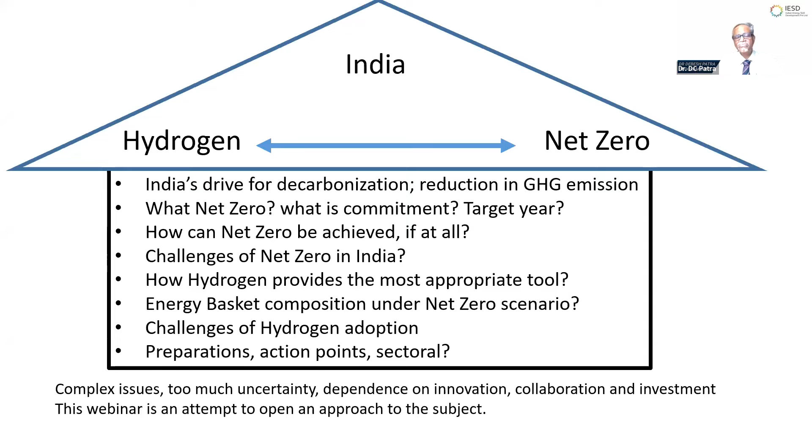If you look at the domain this subject covers, it covers scientific study, technical innovation, economic analysis, business strategy, and public policy. You can see the vast scope of these domains. We won't touch everything under this domain, but we will see the outcome of this discussion as it is happening at a global level.

The first question we'd like to address: what is net zero? Everyone has some idea about net zero, but let's get clarity and precision. Net zero is also referred to as carbon neutrality. It does not mean that a country would bring down its emissions to zero.

It implies the employment of a mechanism that would offset the amount of carbon emitted by a country into the atmosphere by absorbing an equivalent amount of greenhouse gases from the atmosphere. That is why it is called net.

The time taken to reduce net emissions to zero, and thus the total mass of greenhouse gases in the atmosphere, will determine the final equilibrium temperature of the Earth. The scientific community has given us a target of 2 degrees Celsius, and in some places it is referred to as 1.5 degrees Celsius above pre-industrial times.

We must also understand that from the pre-industrial time till today, say till 2022, there is already some amount of greenhouse gas existing in the atmosphere. There is a theoretical limit beyond which the temperature would exceed 1.5 or exceed 2 degrees Celsius.

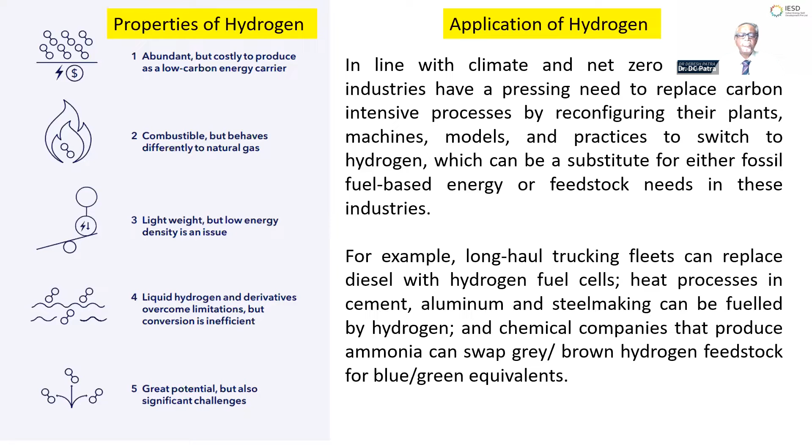Now, some examples to understand the implication. Long-haul trucking fleets can replace diesel with hydrogen fuel cells. Heat processes in cement, aluminum, and steel making can be fueled by hydrogen. Chemical companies that produce ammonia, currently using gray or brown hydrogen, can swap for blue or green equivalents.

So, putting everything together, hydrogen - the question I am addressing here - so much of hydrogen is being spoken about. Is it a hype, or is it an imperative and a possibility?

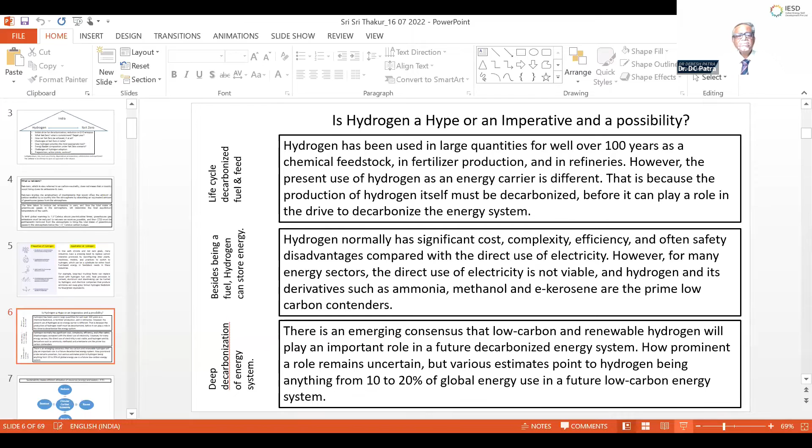There are many things spoken about hydrogen. A significant point we need to know is that hydrogen as a fuel is nothing new. But what is new today is that decarbonized hydrogen is what we are talking about. Therefore, the life cycle of hydrogen, right from production till its consumption, has no carbon emission.

The second important point is hydrogen can be used not only as a fuel, but it can store energy, and therefore carry energy from one place to another where it can be better consumed. Hydrogen derivatives like ammonia, methanol, and synthetic kerosene are the prime low carbon contenders, as an example.

The third significant point about hydrogen, from which I can make a statement that it is not a hype, it's an imperative and a possibility: there is an emerging consensus that low carbon and renewable hydrogen will play an important role in the future decarbonized energy system. How prominent a role remains a bit uncertain, but various estimates point to hydrogen being anything from 10 to 20% of global energy use in a future low carbon energy system.

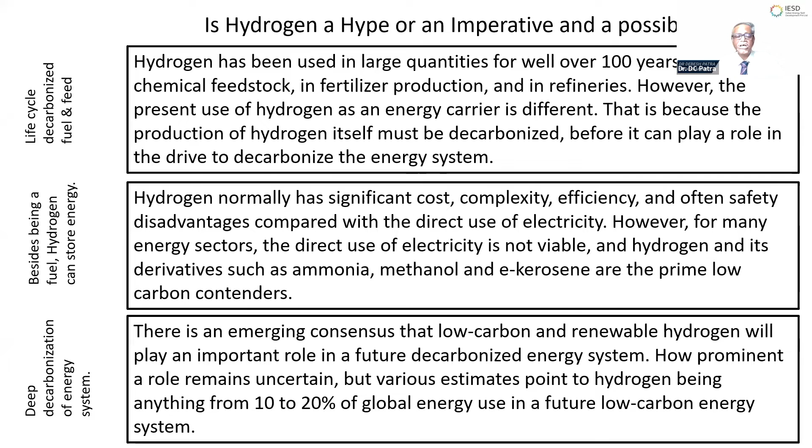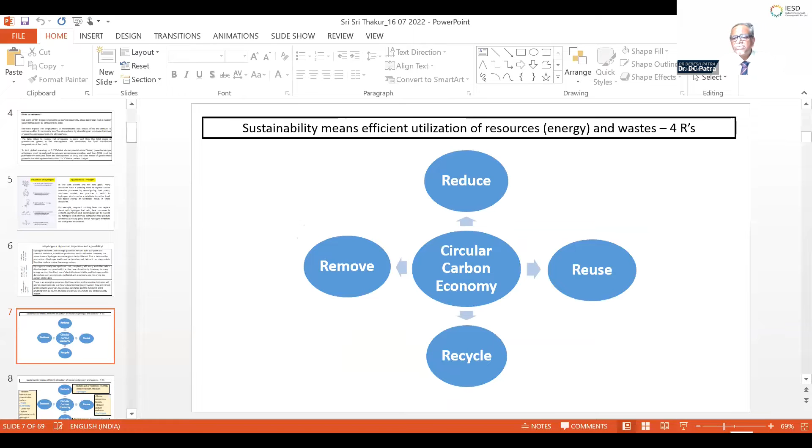Now we know there is a drive towards sustainability. Sustainability essentially means efficient utilization of resources and wastes, and in our case we are taking resources as energy. There are 4 R's that are being advocated for efficient use of resources and waste: reduce, reuse, recycle, and remove. Together these 4 R's constitute the circular carbon economy. Now let us look at how hydrogen is fitting into this circular carbon economy, and how it contributes to each of these 4 R's.

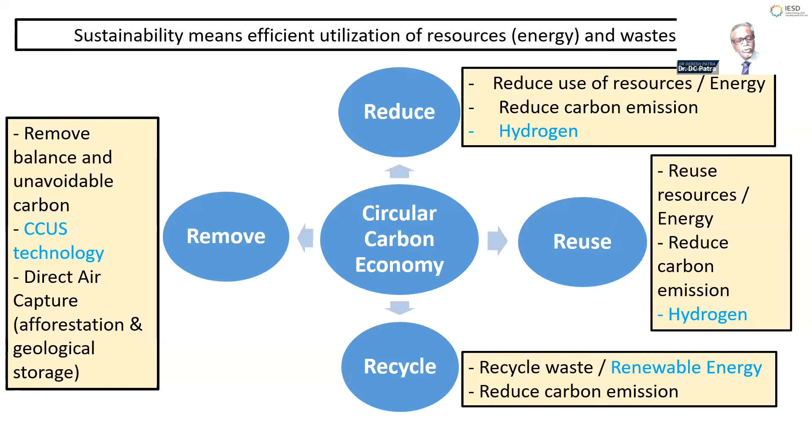Reduce: reduce use of resources and energy, reduce carbon emission - here hydrogen plays a role. Reuse: reuse resources, reduce energy and carbon emission - there again hydrogen comes into play. Recycle: recycle waste by renewable energy - there hydrogen has a role. And remove: you remove the balance and unavoidable carbon by using CCUS technology, which is carbon capture, usage, and storage - and that is part of the hydrogen process, the blue hydrogen generation process. Direct air capture can happen by afforestation and geological storage using CCUS technology. So, what we see is that in all 4 R's of the circular carbon economy, hydrogen has a role to play, and that is where the significance of hydrogen comes in.

Now let us look at the world. Why are we looking at the world? Because it's an incipient technology. Many countries in the world have taken steps towards the adoption of hydrogen, either in production, storage, transportation, or usage. Now we will draw some examples from there.

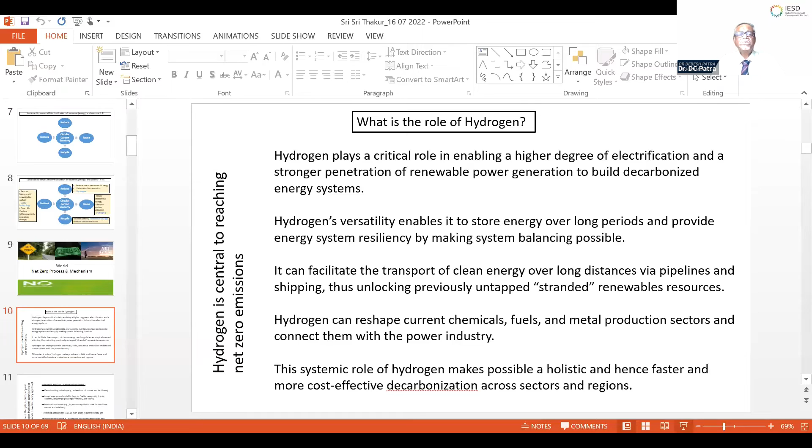Now the statement that we are making here is, what is the role of hydrogen? As I discussed, hydrogen plays a critical role in enabling a higher degree of electrification and a stronger penetration of renewable power generation to build a decarbonized energy system.

Hydrogen's versatility enables it to store energy over long periods and provide energy system resilience by making system balancing possible. How all these things happen is a matter of detail. Within this limited time, I am not going into that, but the role that hydrogen plays is what is being brought out.

Hydrogen can facilitate the transport of clean energy over long distances via pipeline and shipping, thus unlocking previously untapped stranded renewable resources. Hydrogen can reshape current chemicals, fuels, and metal production sectors and connect them with the power industry. This systemic role of hydrogen makes possible a holistic, and hence faster and more cost-effective, decarbonization across sectors and regions.

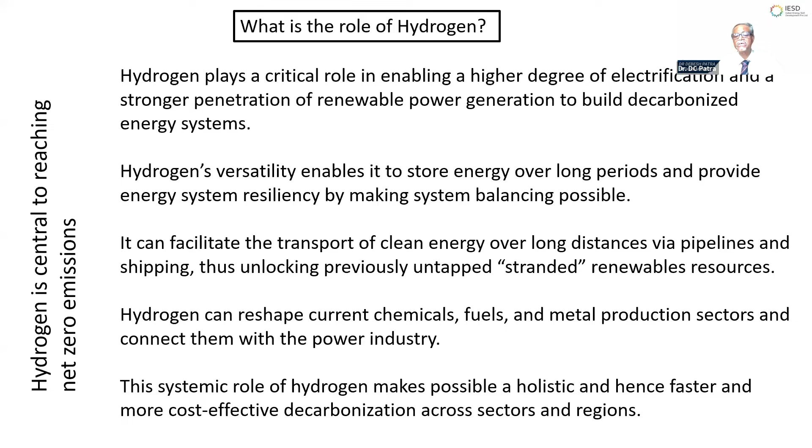By regions, what we mean is that today, for fossil fuel, there are geographies where it is produced and geographies where it is consumed, and the fossil fuel physically has to be transported from the production zone to the consumption zone. But hydrogen can be produced and consumed in a distributed way. Therefore, every region, every locality, subject to certain favorable conditions, can produce hydrogen and can consume hydrogen. Therefore, the interdependence of one region on another, or the need for massive transportation of energy sources from one production location to the deficit location, that kind of necessity would not be there.

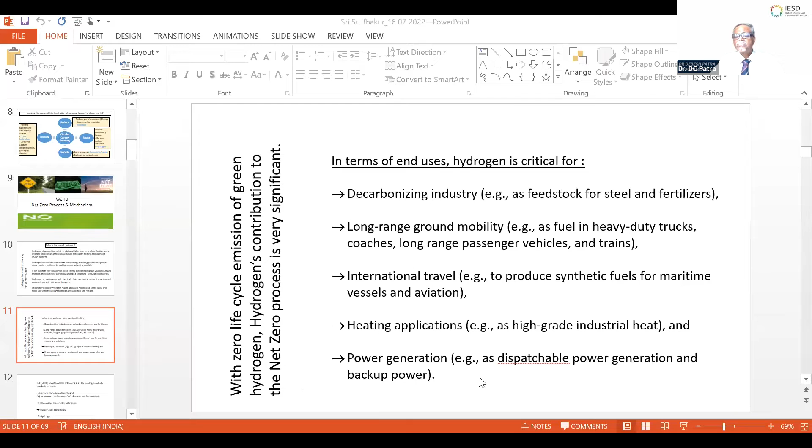In terms of end use, hydrogen is critical for decarbonizing industry, that is, as a feedstock for steel, fertilizer, and cement, etc. Long-range ground mobility, which means it can be used as a fuel in heavy-duty trucks, coaches, long-range passenger vehicles, and trains. For international travel, it can produce synthetic fuels for maritime vessels and aviation. Heating applications, that is, it can be used as high-grade industrial heat, and power generation, which means hydrogen can be used as dispatchable power generation and backup power.

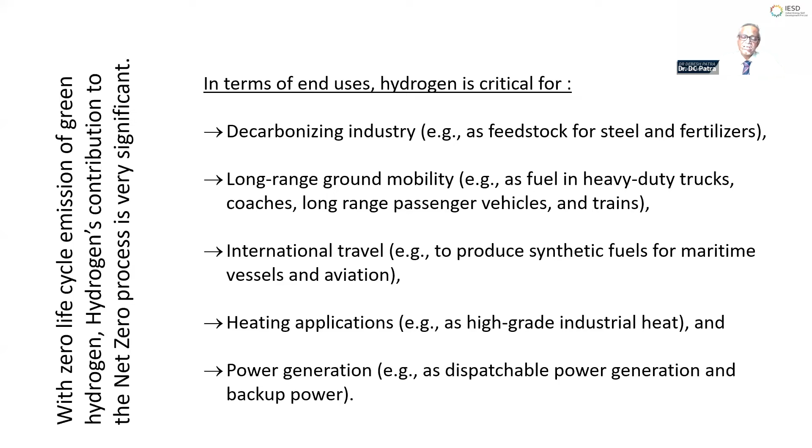With zero life cycle emission of green hydrogen, hydrogen's contribution to the net zero process is therefore very significant. IEA, the International Energy Agency, identified four technologies which can help both reduce emissions directly and remove the balance of carbon dioxide that cannot be avoided. And among those four, hydrogen is a significant commodity.

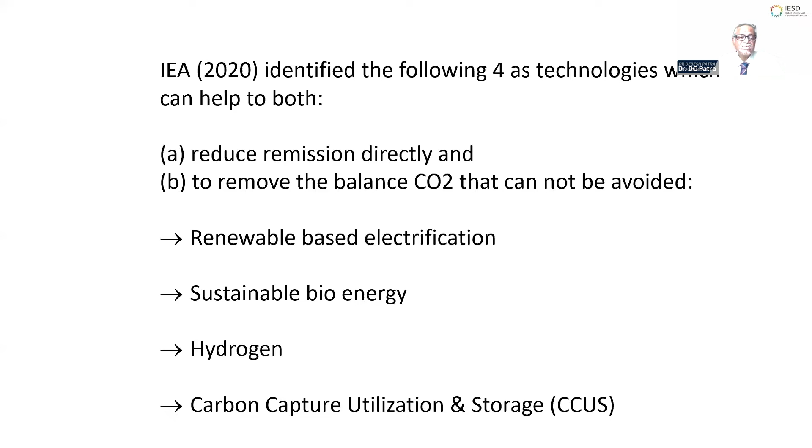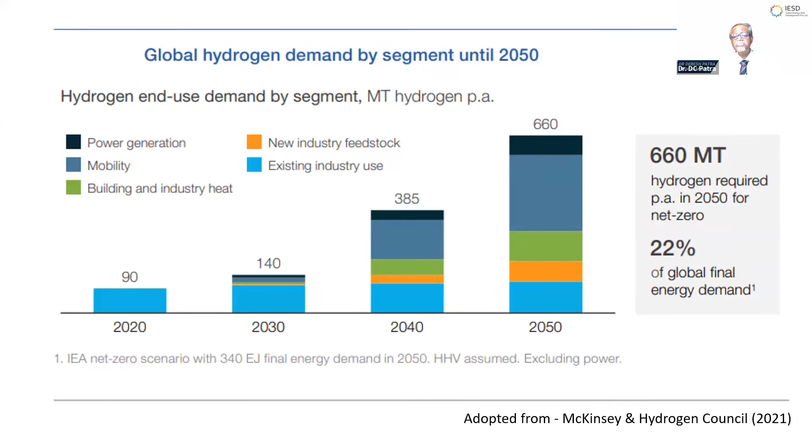Now, taking into account the various forces working in the world, McKinsey has projected that if the current balance of carbon emissions is to be mitigated and further generation of carbon dioxide is to be avoided, then the world by 2050 needs 660 million tons of hydrogen. Now, what exactly the world can produce is a subject of many favorable forces, but some projections suggest that the world by 2050 can produce, or will produce, 536 million tons of hydrogen.

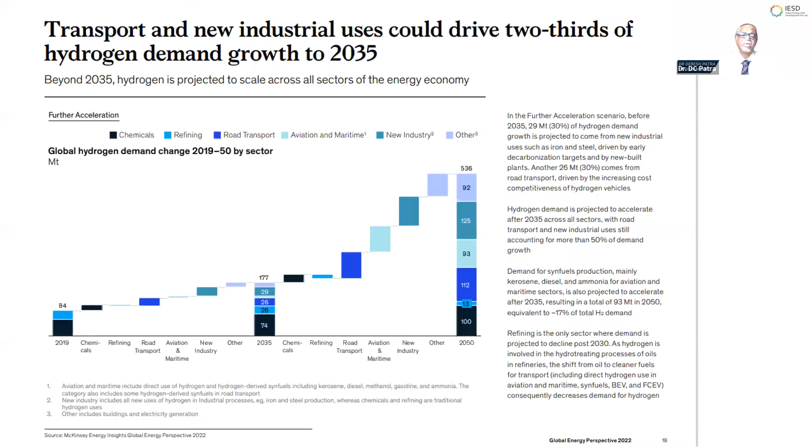And correspondingly, the share of other fuels will get reduced by the year 2050. This graph shows hydrogen coming in a big way from 2030 onwards, and then the graph widens till the year 2050.

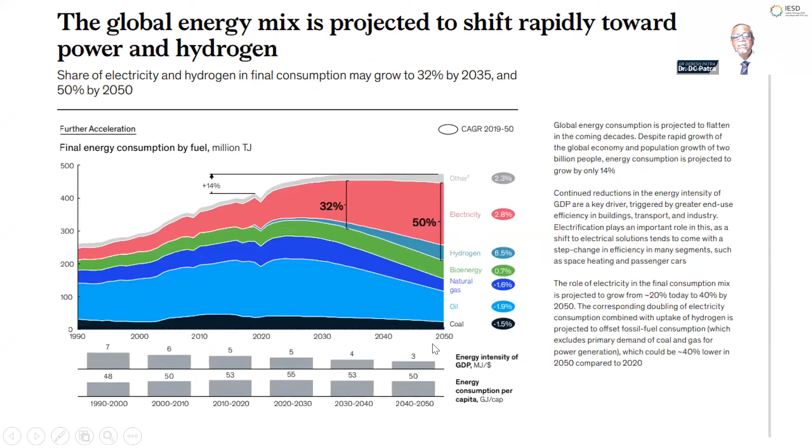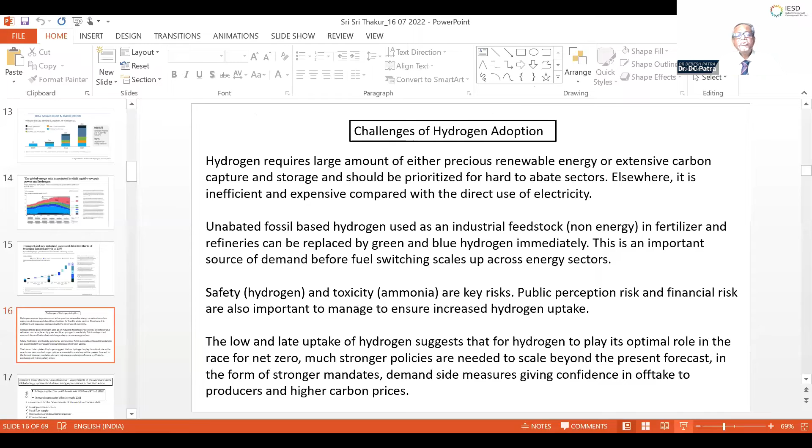However, everything that we said, constituting the promise of hydrogen, of course involves a lot of challenges. Some of the challenges listed here: hydrogen requires a large amount of either precious renewable energy or extensive carbon capture and storage technology, and should be prioritized for hard-to-abate sectors. Elsewhere, it may be inefficient and expensive compared with the direct use of electricity.

Unabated fossil-based hydrogen used as an industrial feedstock, which is for non-energy purposes in fertilizer and refineries, can be replaced by green and blue hydrogen immediately. This is an important source of demand before fuel switching scales up across energy sectors.

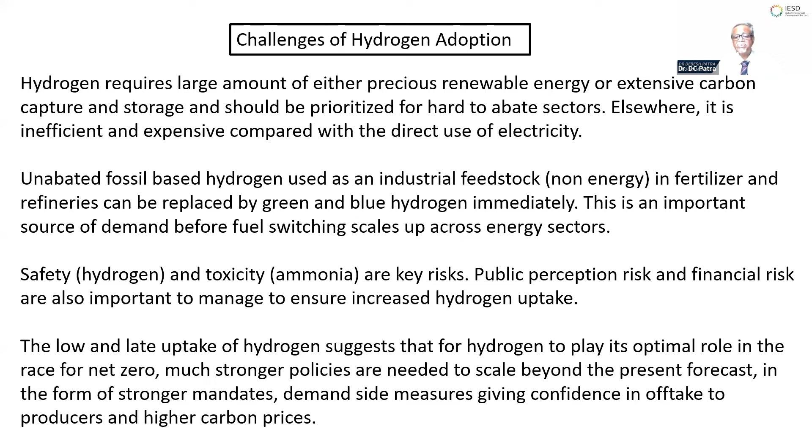Now, safety of hydrogen and toxicity of ammonia are key risks. Public perception of risk and financial risk are also important to manage to ensure increased hydrogen uptake. The low and late uptake of hydrogen suggests that for hydrogen to play its optimal role in the race for net zero, much stronger policies are needed to scale beyond the present forecast, in the form of stronger mandates, demand-side measures giving confidence to producers, and higher carbon prices.

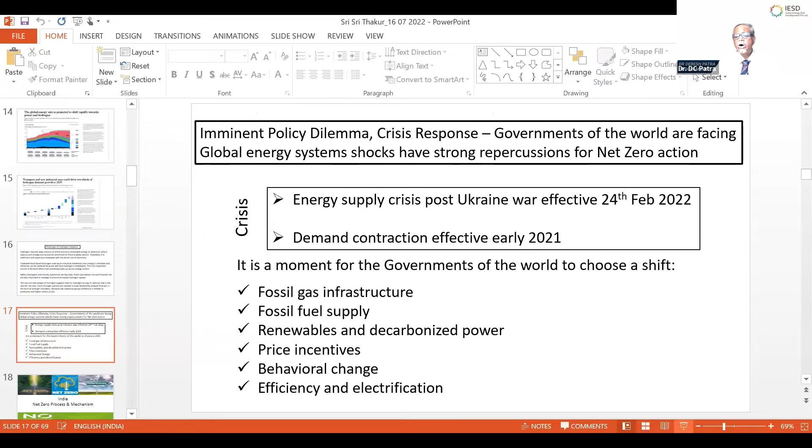There are some imminent policy dilemmas arising from the crisis response of various governments of the world. Global energy system shocks have strong repercussions for net zero action. Recently, the world has come through two crises: one is the energy supply crisis post-Ukraine war, which started on 24th February 2022, and demand contraction, a demand side shock that started from early 2021.

Now it is a moment for the governments of the world to choose which direction they will take: either they will promote the decarbonization process, or they will take care of immediate requirements of the people of the country and continue fossil fuel dependence, at least for some time.

Therefore, the governments of the world are in a difficult position to take a call with respect to whether to build or invest in fossil fuel gas infrastructure, whether to invest in renewables and decarbonized power, whether to give price incentives to the existing fossil fuel based supply, whether to encourage behavioral change towards decarbonization, and whether to increase efficiency and electrification.

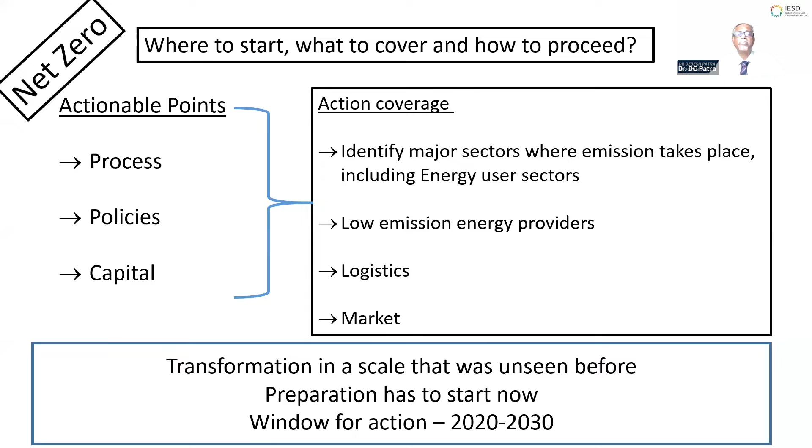So for India, net zero essentially means carbon neutral development. Now mark the word development. India is a developing country. It has to develop. The standard of living of people has to improve. The quality of life has to improve. A large segment of the population has to rise above the poverty line.

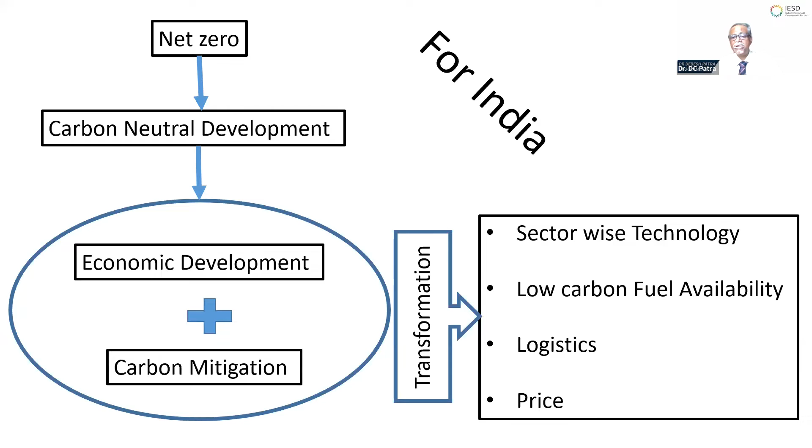So if all these things have to happen, then there will be more energy consumption. It can be fossil fuel, it can be conventional fuel, it can even be low emission fuel. Therefore, the challenge for India is to combine economic development plus carbon mitigation. And the transformation effect will be seen sector-wise: technology, low carbon fuel availability, logistics, and of course at what price we are making it available.

So when we talk of net zero, it does not really remain confined to the energy or oil companies or coal companies, that kind of energy suppliers, producers, etc. Net zero is an all-out strategy. It means transformation in how the country produces energy, consumes energy, how we move, what we eat, how our buildings are designed, how much emission comes from airplanes, buses, trains, and cars.

Net zero also means change in agriculture-related policies, given that emissions from the sector are mainly from rice cultivation and livestock rearing.

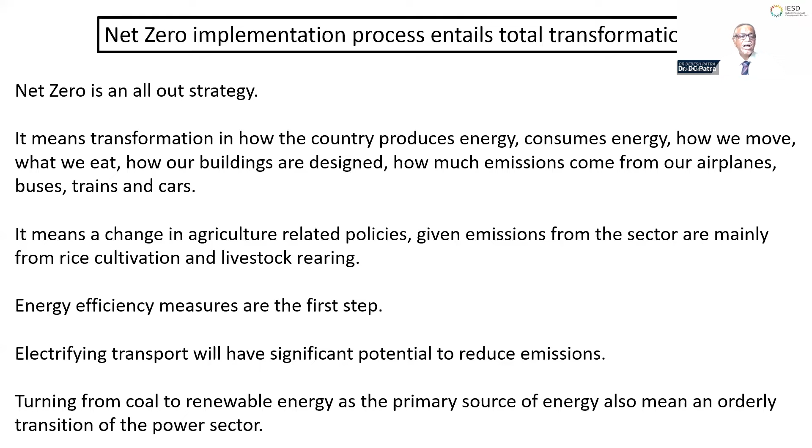Net zero also depends upon energy efficiency. It depends upon electrifying transportation. And it depends upon turning from coal to renewable energy as primary source of energy. It also means an orderly transition in the power sector.

Therefore, the challenge in India is that achieving net zero means deep and significant cuts to fossil fuel use that could affect the development trajectory of India. For India to achieve a net zero target by 2070, usage of coal, especially for power generation, would need to peak by 2040 and drop by 99% between 2040 and 2060. And the consumption of crude oil across sectors would also need to peak by 2050 and fall substantially by 90% between 2050 to 2070.

Now, some international collaboration is very important with respect to technology transfer and finance mobilization. And of course, if we do not take any action, then also there are costs. It is not that there are only costs for net zero. If there is no net zero process, then also the country will pay in terms of various damages.

World over, 9 sectors have been identified where action has to be taken to make this world net zero, to achieve net zero. Those 9 sectors are automotive, power, oil and gas, aviation, shipping, steel, cement, mining, forestry, food, agriculture, and other land use.

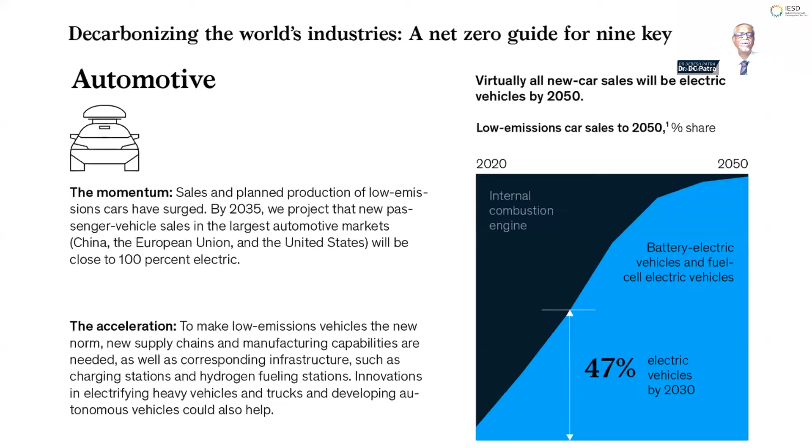So for each of the sectors, there has to be a plan for what is required to be done and what supports are required for those actions to be taken. For example, automotive: what will be the status by 2050? What are the kinds of momentum going on, and how can those momentums be accelerated? So for each of these sectors, there have been action plans. I am not going to get into details - those are there in the presentation.

And the purpose of bringing this to the discussion is that world over, many countries have already identified the sectors where action is required. Similarly, United Kingdom has prepared their plan between 2020 to 2025, 2025 to 2030, 2035 to 2040, and then 2040 to 2050. What all actions have to be done for the UK - those also have been done.

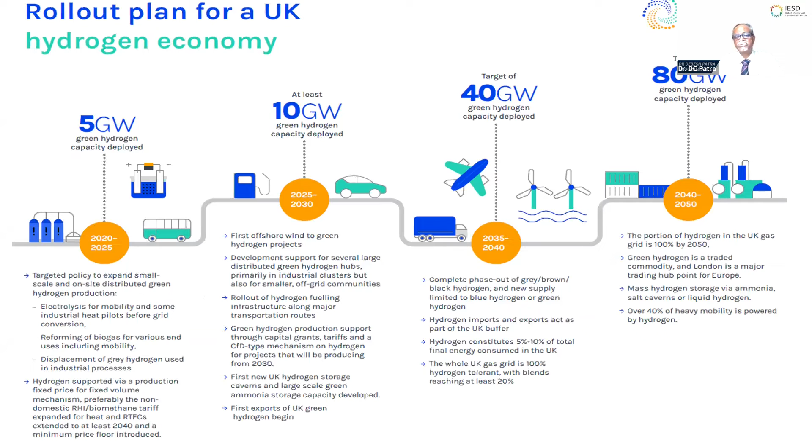Now, what is for India? This is the last 10 minutes I'll take here. India has an advantage. The first advantage is that it is going to be a populous country, and a lot of economic transformation is happening. And the second is that as the country is developing, the green transformation is also happening or can happen, because India has not reached a stage where it has exhausted its carbon budget.

India's energy strategy is primarily based on energy availability, energy accessibility, and energy affordability. India has already taken some movement on the trajectory of energy transition by way of increasing electrification, higher penetration of cleaner fuel in the energy mix, accelerated adoption of energy efficient technologies, and rising digitalization. So these are already in process to a varying degree. Therefore, India's energy strategy is already on this path.

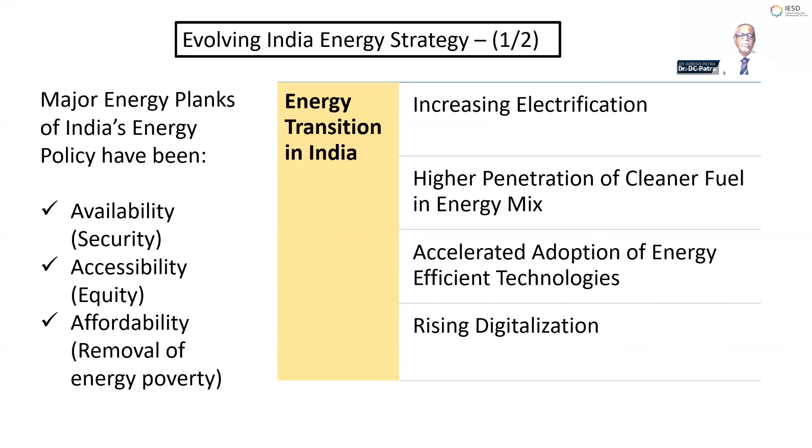And for India, the hydrogen transition efforts need to be situated within the context of low carbon economy, energy security, and a larger economic development ambition. India's thrust towards a low carbon economy therefore currently hinges on an accelerated transition towards a higher share of renewables in the electricity grid, complemented by electrification of end uses such as transportation. But there is a tacit recognition that materials critical to industrialization and urbanization such as steel, ammonia, cement, and plastic have no substitute and cannot be decarbonized with electricity alone.

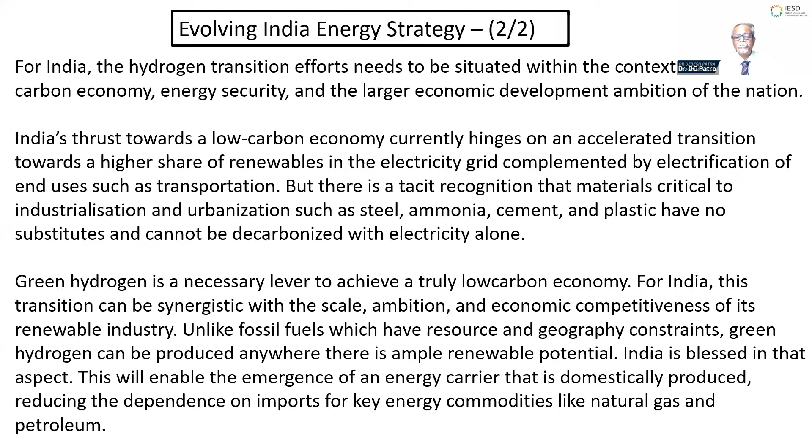And there comes the role of hydrogen. Green hydrogen is a necessary lever to achieve a truly low carbon economy. For India, this transition can be synergistic with the scale, ambition, and economic competitiveness of its renewable industry. Unlike fossil fuels, which have resource and geographic constraints, green hydrogen can be produced anywhere there is ample renewable potential - India is blessed in that aspect. This will enable the emergence of an energy carrier that is domestically produced, reducing dependence on imports for key energy commodities like natural gas and petroleum.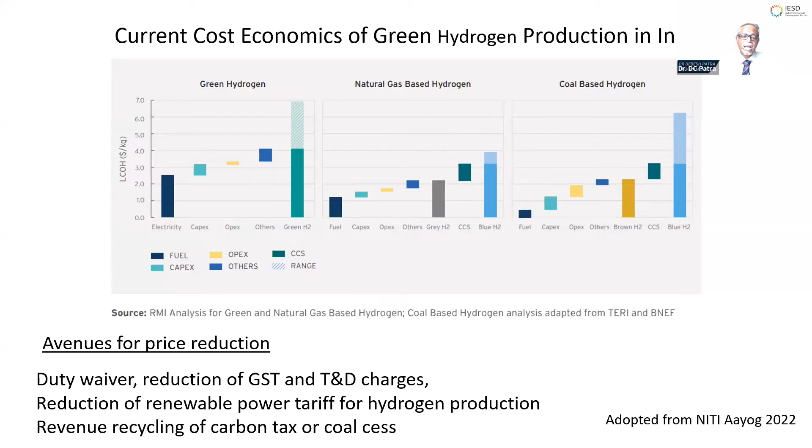Now, at this level, hydrogen doesn't appear to be competitive, but there are avenues for price reduction. Some of these, taken from a document prepared by NITI Aayog in 2022, are duty waiver, reduction of GST, reduction of transmission and distribution charges of electricity, reduction of renewable power tariff for hydrogen production, and revenue recycling of carbon tax or coal cess.

Now India, like the world, has identified 9 sectors. In India, 5 sectors have been identified where action is required, and after those, some cross-sectoral enablers have also been identified. These are energy, mobility meaning transport, industry where energy is used as a fuel, building meaning household consumption, and agriculture, mostly for fertilizers and running pumps and electricity.

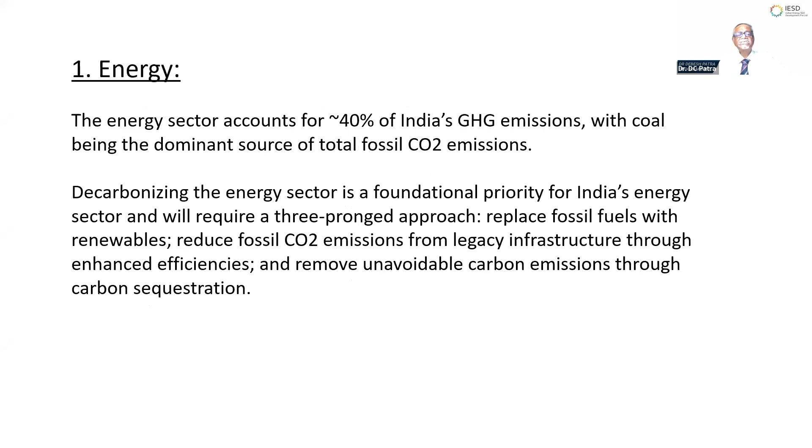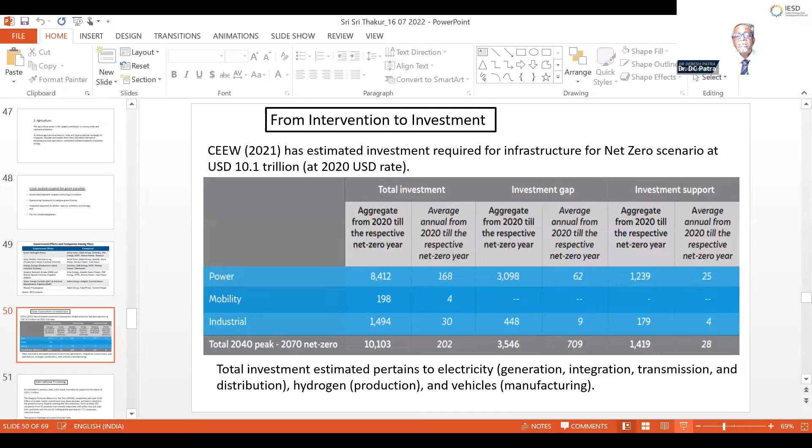Now the question that comes is, yes, we have to innovate and a lot of intervention is required, but each intervention means investment. It has been estimated that 10.1 trillion US dollars is required if India's net zero status has to be achieved by 2070.

Now details have been given: points on power, mobility, and industries, which together give the total investment required, and the aggregate investment required is 10.1 trillion US dollars. The next column says what kind of investment is possible to generate given our investment environment, capital mobilization environment, and the investors' willingness to invest, and how much has to come from foreign countries.

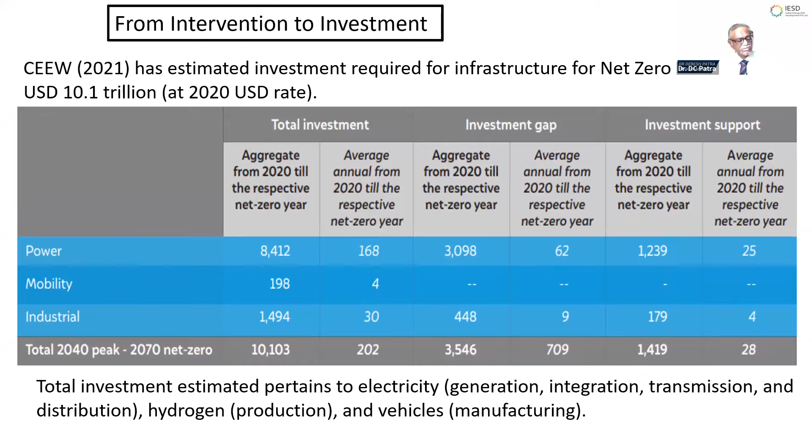And as estimated... I said 1.1 trillion, no, I'm sorry, it is 10.1 trillion US dollars at 2020 rate of dollar required for this net zero status to be achieved by 2070. Now we need international financing for this gap that is there.

And already there are 450 companies from 45 countries that have created an alliance, and they have committed to invest 130 trillion US dollars world over. Now it is a challenge and opportunity for us, how much of that capital we can galvanize and bring to the country.

Now some financial policy measures have already been taken. For example, SEBI has taken some measures to declare sustainability reports, etc. These are primarily to make sure that an investor has confidence in this investment, and RBI has taken some measures for strengthening the kind of investment required for this renewable sector.